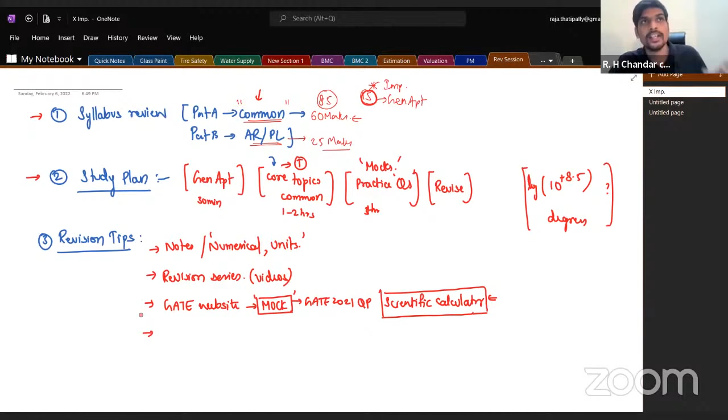Other than that, I would also suggest you go through previous gate papers. You might have already solved some, but I'd say at least sit and solve one paper, or see how you can do it, probably on the last day. When you're not in a state of mind to read something new, you can at least go and practice one gate paper. Even if you've done previous gate questions in general, you can randomly pick up a previous gate paper and try to solve one, sitting from 9 to 12.

So look into previous papers. If you have not yet done so, this is the correct time — do it. If you have already done it, pick randomly one or two papers and try to solve them. That will give you confidence, that will boost your morale before the exam. So look into the previous gate papers if you have not yet done.

If you have done it already, you can also randomly pick up one or two papers, probably an old one too, and look into it. The idea is not, obviously — yes, some questions do repeat — but the idea is not to build up knowledge, but to give you confidence. I told you in these last 6 days, it is equally important to build up your confidence and have a cool state of mind. So work on it — whatever works for you, work on it.

These are some points which I think are probably useful for people. But if you come up with some other new thing which you think will cool your mind, do that without any problems. The most important thing — not only studying but also having a cool state of mind — both are important.

So previous gate papers, that is something you can revise. These are some revision tips which I thought would be kept in mind in these last few days. Other than that, let us also look into some important points with respect to the exam.

During the exam, some important points to keep in mind. This is for the date 13th of February, from 9 a.m. to 12 noon.

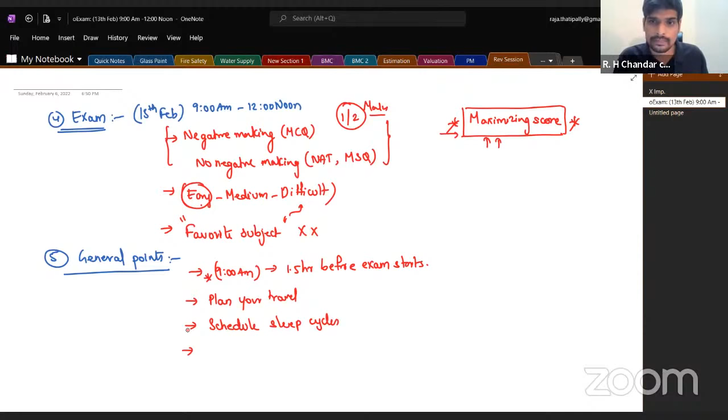I'll book a cab that day and probably the cab won't be available. So try to plan, see if cab availability to your exam center will be there in the morning time. Plan everything, don't have any uncertainty. Plan your travel and also anything else, whatever you can plan, keep it ready. Don't have any unknown surprises at the end moment.

Other than that, what items would be allowed to be carried into the examination center? Items allowed.

Items allowed probably are a pen, a simple ballpoint pen or a pencil. You need not carry any rough sheets, those will be provided to you at the examination center. Just carry a pen or pencil.

Other than that, you'd be allowed to carry the admit card. Most important, don't forget your admit card. Take a printout, have it ready. Physical copy is required, don't have it in your phone, because phones are not allowed in the examination center. I hope that is understandable and you're aware of it.

Have your ID card, the same one whose details you entered during registration on the gate portal. So carry the ID card and take a printout of the admit card.

Take a pen, a water bottle, and sanitizer. The water bottle would be allowed. Mask and gloves would be allowed as per the official notification of the gate portal. Only a clear, transparent water bottle would be allowed as per the guidelines, if possible. Mask and gloves are allowed, and lastly, a sanitizer bottle would be allowed.

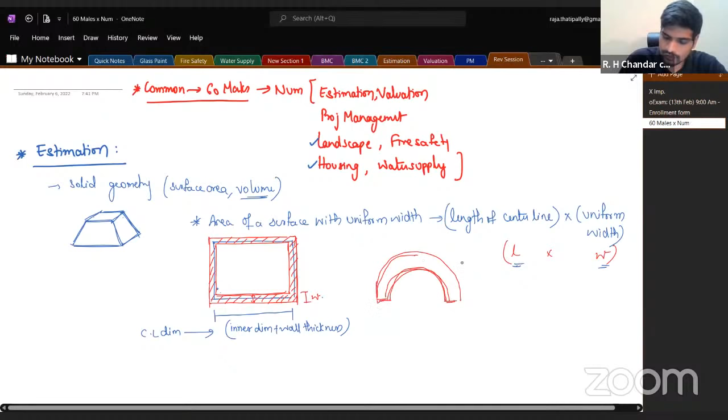Other than that, if you want to estimate an arch - say a semicircular arch or a segmental arch, any form of arch - to estimate the area of this particular arch, since arch also has a uniform thickness W, you use length of the center line L multiplied by the width. So this is one other application. So for any such particular application, you have to use this formula: length of the center line into uniform width, that will give you area. That's point number one, which is important under estimation.

Point number two under estimation is with respect to volume - volume of any prismatic solid. A prismatic solid is something which has a uniform cross-sectional size or cross-sectional area. So volume of a solid with uniform cross-sectional shape and size. Example would be a cylinder. Wherever you cut a cylinder, you will get the same cross-sectional size, a circle, right? So any solid figure with a uniform cross-sectional shape and size, you have to use this formula: volume is equal to the uniform cross-sectional area multiplied by the length of the push of that cross section.

So how do you develop such uniform shape figures? How do you get prismatic solids? You create a cross section and pull it in one dimension to some length L. This is the length L, and this is the area, pi r square, probably for a circle. So for a cylinder, what is the volume? It is basically the area pi r square into h - area of the cross section into the length of it. So this is something which works.

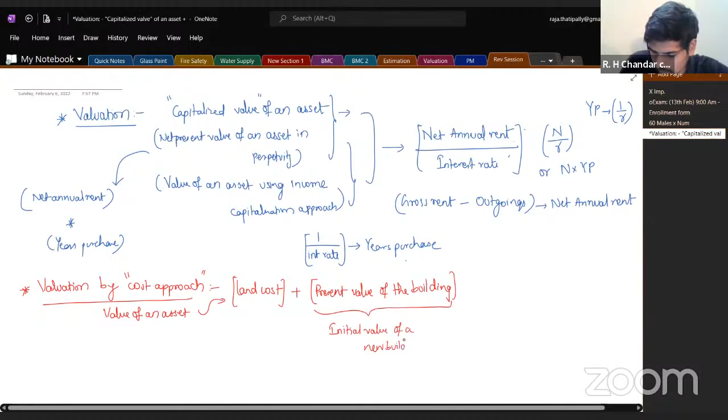So land cost plus the present value of the building. How do you find out present value of the building? Present value of the building is calculated by the initial value of a new building minus the depreciation. Initial value of the building minus depreciation. In the context of valuation, this term can also be called as book value of the asset.

So this is something which you can find out.

Valuation by cost approach: value of the asset is calculated as land value plus the present value of the building, which is the book value of the building. That is basically the value of a new building when it was constructed, say 5 years ago, minus the depreciation for the given number of years. If the building was constructed 5 years ago, you subtract the depreciation for 5 years.

This information related to depreciation will be given to you in the question. If you're using the straight line method and depreciation is given as, say, 1,000 rupees per annum, you use straight line method. If a percentage is given, then you use the diminishing balance method. You need to remember these various methods of depreciation, and look into the details of straight line method (SLM) and diminishing balance method of depreciation.

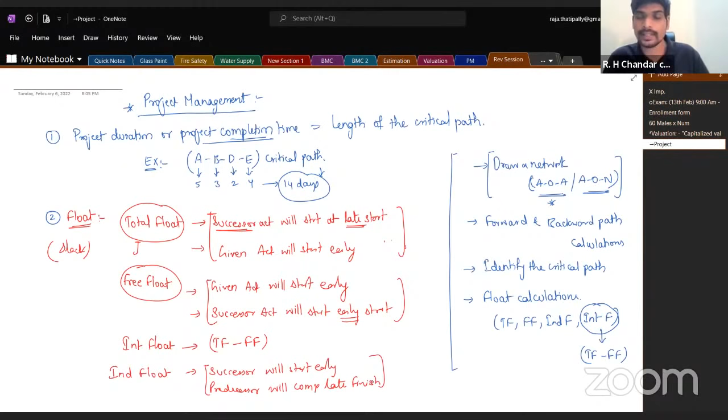This consideration will give you a minimum available time. Subtract the duration from it, you will get independent float. So remember these concepts, have these points beside you, go through the formulae once, try to understand the concept, have sufficient practice. So remember float calculations with respect to project management.

And finally, under project management, let me discuss about PERT, Program Evaluation Review Technique. I'll just tell you two important points under this. Point number one is with respect to expected time.

Expected duration in PERT is given by optimistic time estimate plus 4 times most likely time estimate plus pessimistic time estimate, divided by 6. One of the most frequently asked numericals under project management in GATE exam. Remember this as the first point under PERT.

Second point under PERT you can remember is variance. The formula for variance of an activity, denoted by sigma square, is given by TP minus TO whole square upon 36. This is the second important formula which you can remember under PERT.

Third important point which you can remember under PERT is variance of an activity or variance of a network. Variance of a project is given by sum of... it is given basically by the variance of the critical path.

Remember, there can be multiple critical paths also. If there are multiple critical paths, you need to identify the variance of each critical path and take the maximum one for calculation purposes. So variance of critical path is basically given by sum of variances of critical activities, the critical activities of a critical path. This is also an important third point which you can remember. So how do you find variance of a project? Add the variances of the critical activities. Take all the critical activities, use this formula to find the variance of each activity, add all those variances, and get variance of the project, denoted by sigma p square.

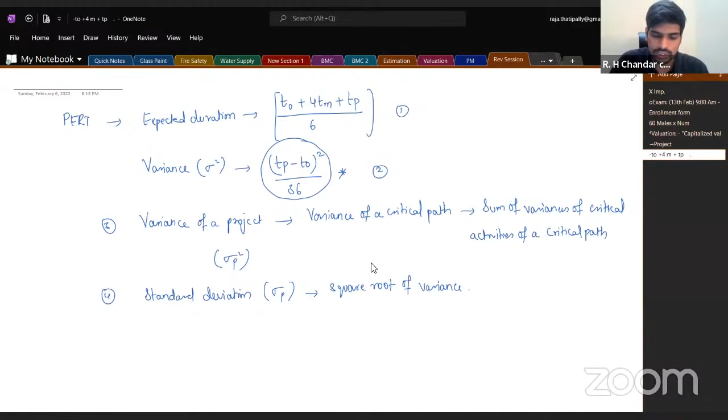So these are some basic pointers which you have to keep in mind with respect to Program Evaluation Review Technique under project management. So that's a quick revision of the project management and estimation and valuation part. Let me discuss some pointers with respect to water supply as well. Let me tell you the important pointers, a quick revision of some points with respect to water supply.

Firstly, you can remember some standards of water supply rate. Rate of water supply is calculated in LPCD, which stands for liters per capita per day. For towns, as per URDPFI guidelines, the required water supply rate is given as 70 LPCD. For cities, it is given as 135 LPCD, liters per capita per day. And for mega cities, it is given as 150 LPCD. So remember these basic standards with respect to water supply.

Other than this, I would also suggest you go through the NBC standards, NBC 2016, volume 2. There is a topic called water supply under the services part. In this, there is a table given for water supply requirement of various buildings, like for hospitals, what is the required water supply rate.

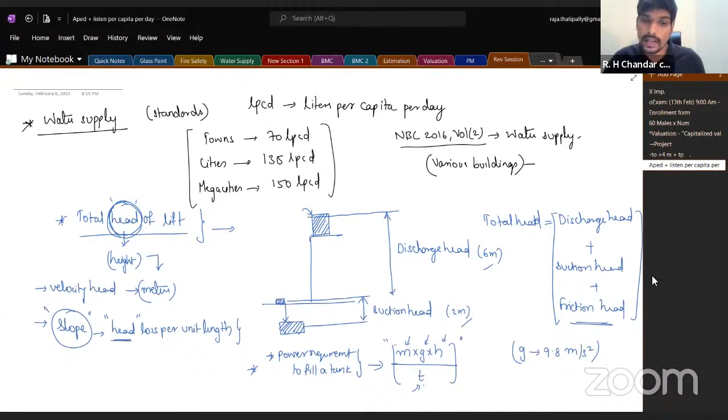Someone is asking what is the measurement unit for friction head. Remember, in every term where you find head, the measurement unit will be meters. Discharge head is taken in meters, suction head is taken in meters, friction head also is taken in meters. You can also call it friction loss.

The idea is, if the suction head is 2 meters and discharge head is 6 meters, you don't buy a pump to work for 8 meters. Rather, you will buy a pump to work for 10 meters. Why am I taking that 2 meters extra? That extra 2 meters is to overcome the friction. Remember this in the exam.

Someone is also asking on mass. Yeah, mass has to be taken in kilograms. Acceleration due to gravity is meter per second square. H has to be taken in meters. Time has to be taken in seconds. If you do that, you will get your answer in watts. Everything in SI system: mass in kilograms, acceleration due to gravity in meter per second square, height in meters, time in seconds. Then you will get your answer in joule per second, that is watts. Remember this.

Next point, let me discuss two important formulae with respect to velocity. Ashik Chakraborty, no, H is the total head of lift. It is got by adding discharge head, suction head, and friction head, all three.

Anyways, moving on. Let me tell you two important formulae with respect to the velocity of flow. Actually, I told you friction head would be given to you in the question. It depends on the material of the pipe. So if it is a CI pipe, if it is rough, its friction head will be different. There's no mathematical approach as such to follow; it should be given to you in the question.

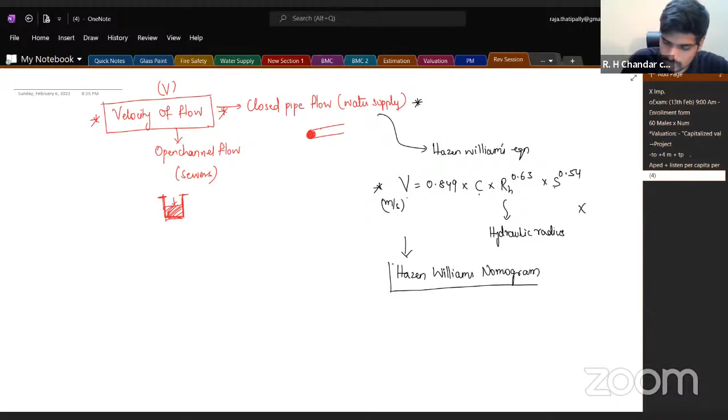Generally, theory questions have been asked with respect to the Hazen-Williams coefficient. In addition to this, you can look into what is the Hazen-Williams nomogram. Take some time and look into the details of this nomogram. Theory questions have been asked with respect to the nomogram in GATE exam from the Hazen-Williams equation part.

However, from the Manning's equation for open channel flow to find out velocity - so in closed pipe flow we use Hazen-Williams equation, similarly in open channel flow, to find out the velocity of flow, we use Manning's equation. There have been numerical questions asked in previous GATE with respect to Manning's equation multiple times. Let us look into the formula for Manning's equation. Velocity is given by 1 upon n, where n is the Manning's coefficient of roughness, will be given to you in the question, into hydraulic radius to the power of 2 by 3, multiplied by slope raised to the power of 1 by 2. That's the formula for Manning's equation.

In both the cases, RH is hydraulic radius. So how to find out hydraulic radius? It is calculated as wet cross-sectional area divided by wet cross-sectional perimeter. This will give you the hydraulic radius of the given flow.

So here you need to be slightly careful while working with open channel flow. Say this is a rectangular cross-section and this is the liquid flow. Wet cross-sectional area is pretty simple - you take the complete area, length into breadth of the flow, that will give you wet cross-sectional area. As far as wet cross-sectional perimeter is considered, you will add only the wet surfaces, this and this. There is no wet perimeter on the top in this case. In open channel flow, you get perimeter by adding this length and this width, L plus W - this will be the wet cross-sectional perimeter, while wet cross-sectional area will be L into W. So remember that the top surface is not added in the wet cross-sectional perimeter, only in open channel flow.

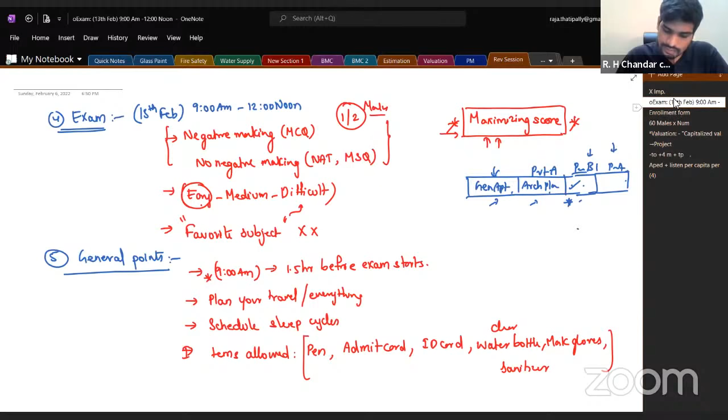Before I end my part, for the architecture portion at least, for climatology revision, lighting, structures, you can look into the revision series as I told you in the initial part. On the same YouTube channel you're viewing this video on, there's a revision series of videos. Each video is probably 25 to 30 minutes long, giving a full overview of history of architecture. Look into the revision series of all sections on our YouTube channel. That will be a good revision source at this end moment of time. Remember, the idea of this session was to revise a few concepts.

What was more important was to focus on these generalized points which I told you as an introduction. Keep those points in mind. I hope you will go to the examination hall in a cool state of mind. That is the most important and absolutely necessary thing at this point of time. Work on having a cool state of mind, whatever works for you. Be calm, be confident in your preparation, and that will really help you a lot in getting a good score in the examination.

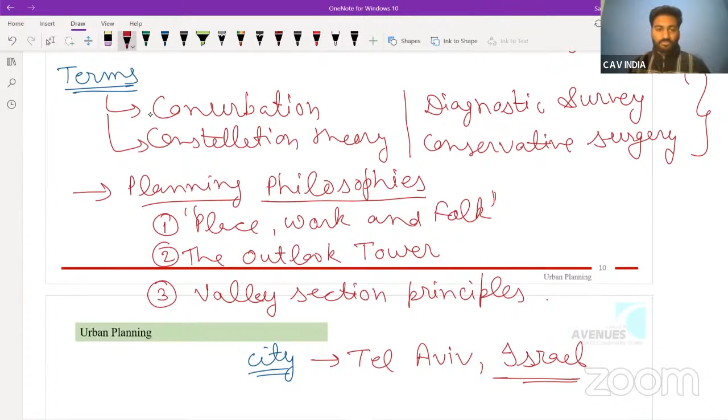Then if you look at another example, let's say we have Sir Ebenezer Howard. For him, you can remember two things. First is Garden City, and second is the theory of three magnets. After that, you can also get into the details, like the theory of three magnets. Basically, there are those three magnets in which you have the town, you have the country, and you have town-country.

Or for the garden city, you should remember the details about the population, about the size that was given, like population should be 32,000, area should be 1,000 acres, and your agricultural belt around it should be of 5,000 acres. Now, based on this information, GATE just phrases it multiple times into different forms, and they ask questions.

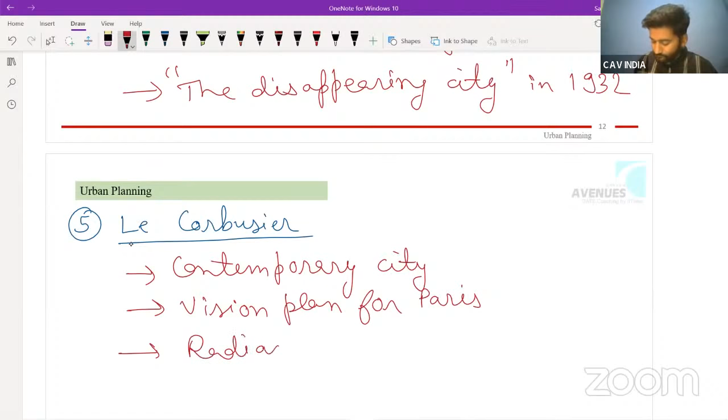Then we have Le Corbusier, and his works include The Contemporary City, Vision Plan for Paris, Radiant City, and Linear Industrial Town.

Now in this part, you need to try to understand that do not confuse between the work of any two planners. Not just in GATE, in other competitive exams also, they ask like Broadacre City is a concept given by whom. So sometimes students get confused that it's by Le Corbusier. So try not to get confused like that. All these details we can remember for Le Corbusier.

We also have Daniel Burnham. And you must be knowing it, the City Beautiful movement.

Now this linear industrial town, we have an ideal industrial town as well. We have self-sufficient industrial town as well. So again, try not to get confused. Like we have, let's first write the name, Robert Owen, with self-sufficient industrial town.

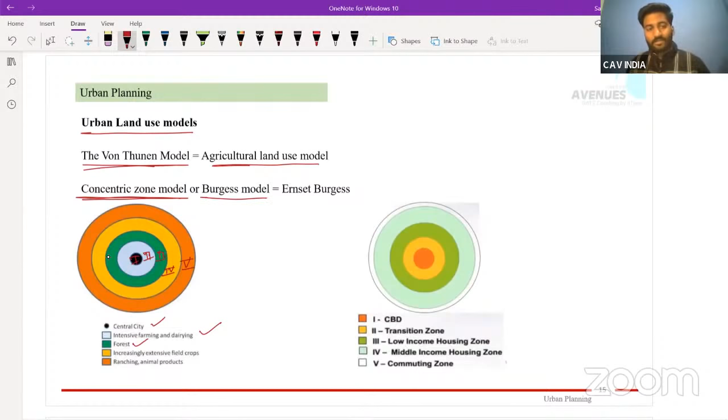Because sometimes what GATE can do, they can number them 1, 2, 3, 4, 5 like that. And then they can ask you about match the following or out of other options given. So this is how you need to remember both of these concentric zone models, both of these having concentric circles, but you should know their land use. It is also called as Burgess model. So if there are multiple names for anything, you need to remember all the details given by Ernest Burgess. So again, for this one, remember the details: CBD, transition zone, low income zone, middle income, then commuting zone.

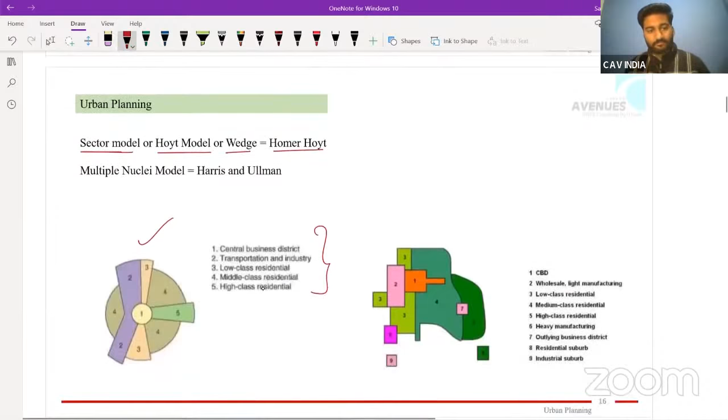After that, we have these two land use models also. One is sector model or Hoyt model or wedge, which is this first one given by Homer Hoyt. All these details, they are similar to this one. He just said that the development will not occur in concentric circles, but it will develop in the sectors. After that, we have multiple nuclei model by Harris and Ullman.

This is this one. Also remember the overall form of it. GATE can just give you the outline of this model and they can ask you to identify it, or it is given by whom. Such questions.

After this, in urban planning, we can again remember some more theories and the names of the theorists. We have growth pole theory, given by Francois Perroux, or Weber's theory of location, given by Alfred Weber, or central place theory, given by Walter Christaller, or core periphery theory, given by John Friedman.

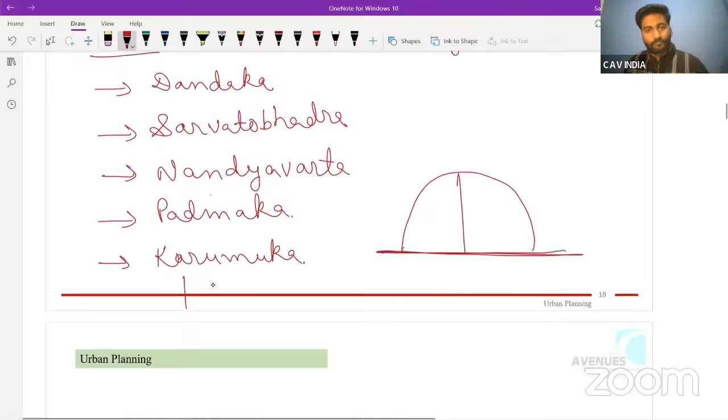After this, when we are looking at cities, you also need to look at examples of Indian cities, and also Egyptian cities, Greek cities. Some of the cities you can go through for GATE perspective are, let's say, first we have the Egyptian cities: Kahun, Luxor, Thebes. For the Greek cities, we have Piraeus, Miletus, Rhodes. At least for sure, remember these names.

After that, you can go through their layouts and see, okay, Hippodamus plan is there, some grid layout is there. So those details you can cover. Just go step by step - first remember whatever is in front of you, that these are Greek cities, these are Egyptian cities. After that, you can go through further details of them.

Then we have Roman cities, like Timgad or Pompeii. Previously a question was asked that Timgad is a type of which city - Roman, Greek, Egyptian. So such simple questions you can also expect in the exam.

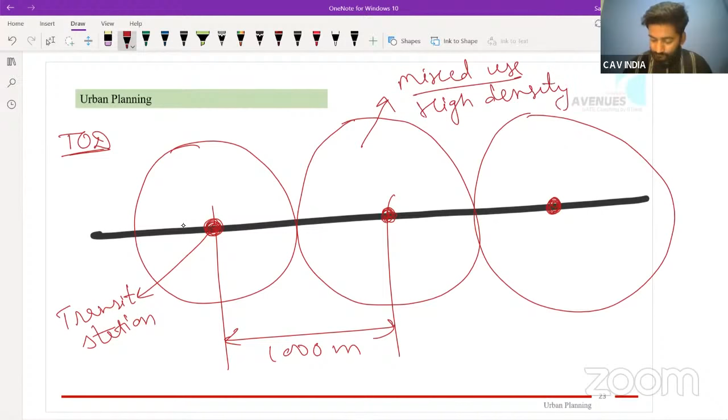So this, we just get an overview of transit oriented development, and that was about urban planning. We discussed the importance of urban planning with respect to GATE exams, what kind of questions, how many questions we can expect, and we also get into the detail of that theory part.

Now if we look at urban housing, again urban housing in GATE exam is important because you can have 2 to 3 questions, and these questions are both theoretical and numerical. In urban housing, the numerical part is very important. You can expect one numerical question each year for sure. And there are different types of numericals in urban housing, so we'll look at that also, and the concepts, what all you need to remember.

As per the new syllabus, urban housing comes under both common and planning parts. The common part includes the concepts of housing and density calculation, whereas the planning part includes the schemes and programs of government. Then not just about housing, but also about slum development. Standards about housing are also covered.

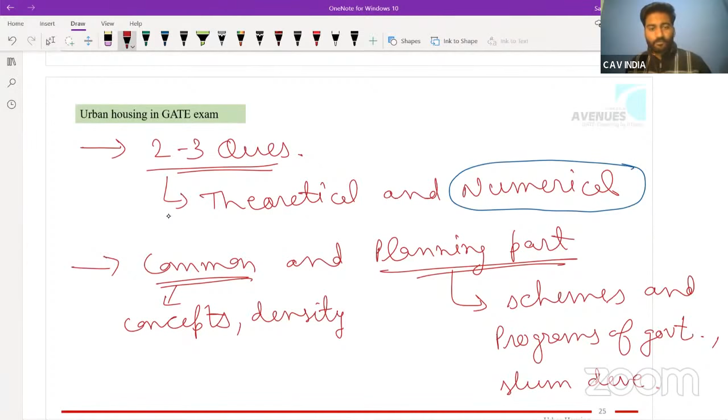So now if we get into the detail of urban housing, first let's start with the basic concepts like carpet area, built up area, super built up area. Carpet area is your area in which you can actually lay down your carpet, so you will not include the area which is covered by the walls.

But also in this carpet area, you will not include certain parts, like you will not include stairs, you will not include shaft, you will not include bathroom, kitchen, balcony. These things are not included.

After this, net area, you can just say that it is the area where one can spread carpet.

Then if you look at the built up area, built up area will include all these areas. It will have the carpet area plus all these above areas, plus it will have the walls and any exclusive balcony if it is there.

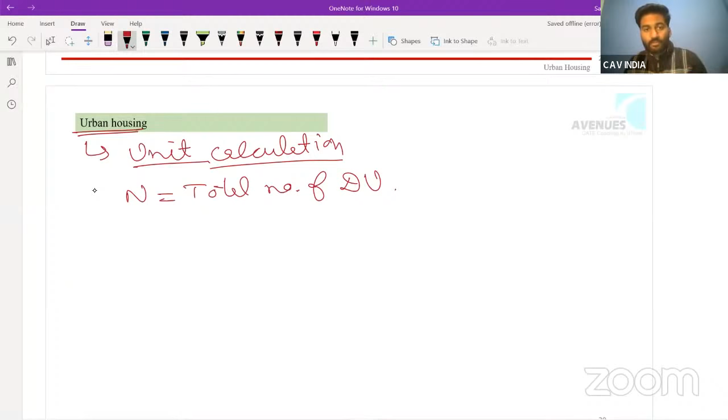In housing, one type of question we need to understand is unit calculation. Let's say we have capital N, which is total number of dwelling units, and there are three different types of dwelling units: dwelling unit 1, 2, 3, or for LIG, MIG, HIG, we can have division in this total number of dwelling units.

Let's write the types: type 1, type 2, type 3. Out of these total dwelling units, they have their share, like P1%, P2%, P3%. For example, 30% type 1, 20% type 2, like that. And each unit of type 1 has area A1, type 2 area A2, type 3 area A3, like 30 square meter area for one unit.

Therefore, for the unit calculation, it will be N multiplied by P1 multiplied by A1. This part gives you the total area under type 1, plus N into P2 into A2 — you first find the number of units under type 2, then multiply with the area of each unit — plus N into P3 into A3, and that gives total built up area. So this is how you find the total built up area.

Now, this total built up area could be given to you using the site area, FAR, all these things. This division could be given to you, and they will ask about the total number of dwelling units. So you need to see what is given, what you need to find.

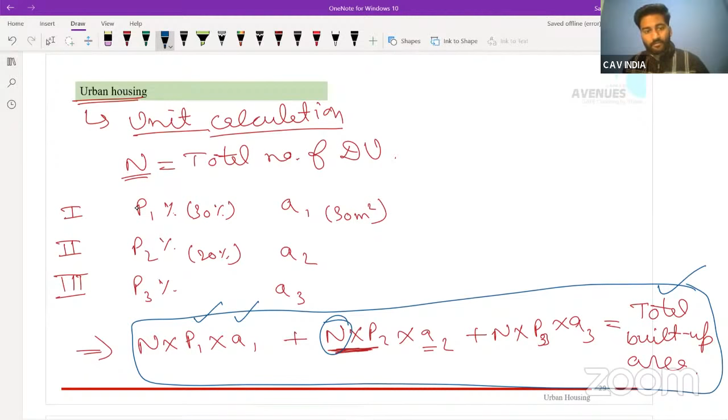After this, we have some financing institutions you need to know, like NHB, National Housing Bank. We have NABARD — these are development financial institutions. Then we have HDFC, HUDCO, some banks, scheduled commercial banks, cooperative banks, and housing schemes. These are different types of financing institutions. Previously, when government became just an enabler, finance was made available to people to build their house. So these are the financing institutions working in the housing sector.

After that, in urban housing, there are different policies or schemes which are basically the guiding principles. You need to remember the names and which year they came: NHP, National Housing Policy of 1988, or NHHP, National Housing and Habitat Policy of 1998. Or NUHHP, National Urban Housing and Habitat Policy of 2007. And the last one is National Mission on Sustainable Habitat. So remember the name, the full form, and the year.

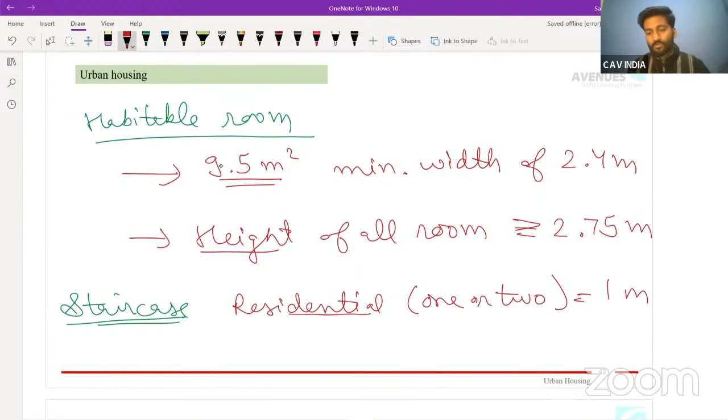Also, if you look at the standard of a kitchen, the height will be same as 2.75 meters, as we have seen. Other details: if you have kitchen with dining, the area should not be less than 7.5 square meters with a minimum width of 2.1 meters. And if there is just a kitchen, then it will be 5 square meters with a width of 1.8 meters. So for the dining part, an additional area of 2.5 square meters was required.

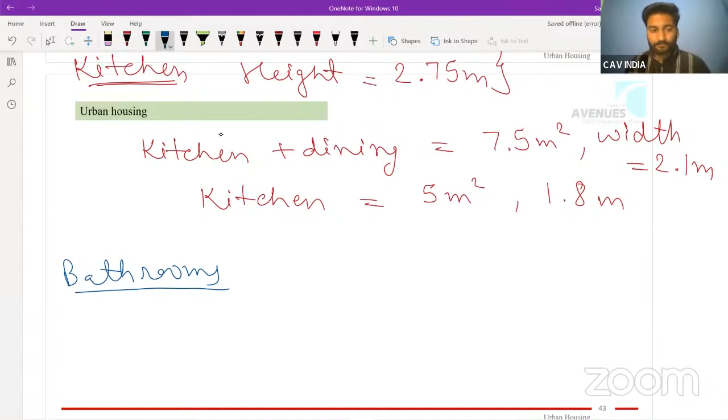Just like kitchen, you can also think of bathrooms. Go through the standards of that. What is the standard for just a bathroom? What is the standard for a WC? What is the standard if both are combined together? Then also remember about the fire tender. These are some general things which GATE keeps on repeating and asking questions on. For fire tender movement, the width of the driveway is 6 meters, and the turning radius there is 9 meters.

So with this, we are done with housing. We saw all the different types of questions they can ask. We understood the concept of them, we looked at the formula, and we also went through the theory part.

Now if you look at urban design, it is also important because you can get 2 to 3 questions on average, so it's like 3 to 4 marks. In these questions, you have majorly theoretical questions, rarely numerical, which also depends upon the degree of enclosure. And it is in the common part of the new syllabus. So we'll cover all those things which are important for GATE perspective in urban design, one by one.

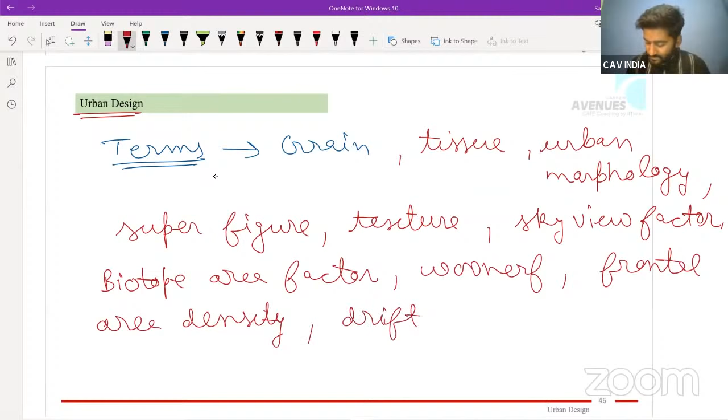Sky view factor, then you have biotope area factor, then we have woonerf, we have frontal area density, we have drift index, etc. So these are some of the terms you should go through for urban design. Also, if you have solved previous year questions, you might have seen some of these terms already. There are also terms like street furniture, street hardware. Look at them.

After this, if you look at the most important topic in urban design, that is degree of enclosure. Basically, let's say this is the person standing here and he is looking at this. So you will consider the height h, you will consider the distance of this person d, and you will find the degree of enclosure based on this ratio h is to d.

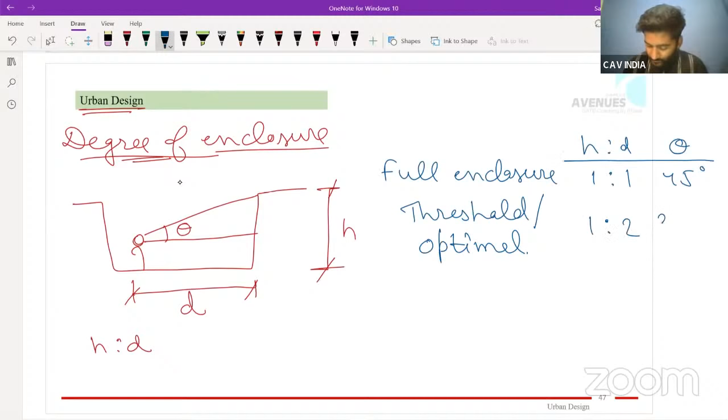For that, you need to remember a table. If you have full enclosure, you will have an h by d ratio of 1:1, or a theta of 45 degrees. If you have threshold of enclosure, or optimal enclosure, the ratio will be 1:2 and the angle will be 26.57 degrees. Then you have minimum enclosure, for which the ratio is 1:3 and the angle is 18.43 degrees. And the last one is loss of enclosure, which is ratio 1:4, and the angle is 14.04 degrees.

Now, all these things on this slide are very, very important for GATE. The reason being, sometimes GATE gives you questions like matching them with their ratio. Sometimes they give numericals like: the person standing in some area is experiencing threshold of enclosure, and the height of the building is given, so tell us at what distance they are standing from the building. So the first thing you should definitely know is this ratio, that it is 1:2.

Now just try to remember these two columns, because if you know how to use tan inverse in that calculator, you can simply find tan inverse of 1/3 and get this value. So no need to remember the values of theta, you can directly find that in the exam. But remember this table, it is very important.

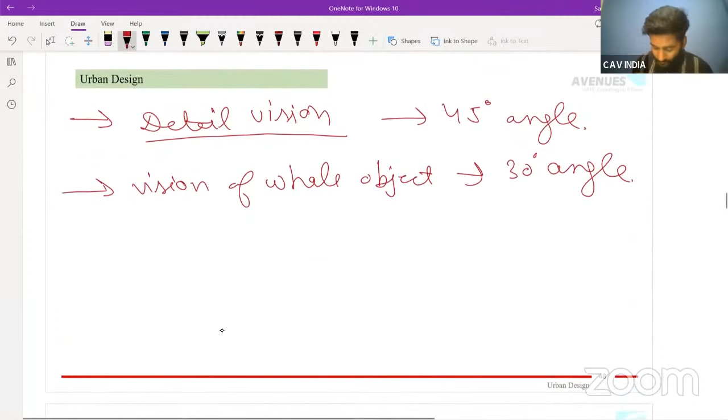Now, along with this table, there are other things, like you will have a detailed vision for a 45-degree angle, you will have the vision of the whole object for a 30-degree angle, and you will have vision of the object plus its context, and that will be of an 18-degree angle. So sometimes GATE gives you these details as well, that there is a vision of the whole object or the context is also visible, so you should know the angle.

Now, after this in GATE, there could be some famous squares, plazas, piazzas, anything you can say, so those you need to remember. Like, for example, we have Trafalgar Square, or we have St. Peter's Square, or we have Piazza del Campo in Tuscany, Italy. For all of these examples, you should know how they look, and if they are famous for something. Like the Piazza del Campo is known for its human scale. So those details you need to remember.

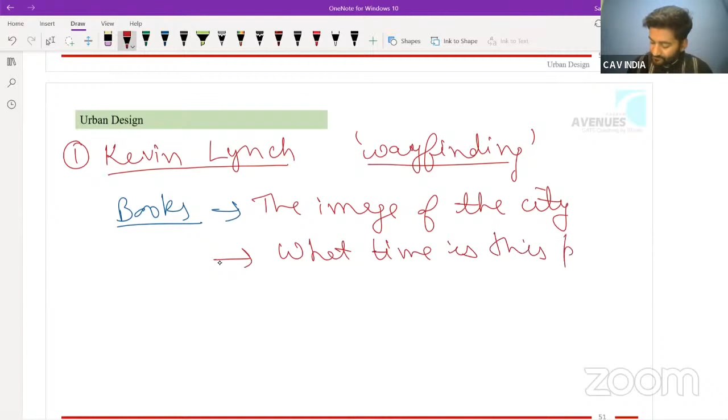The first one we can look at is Kevin Lynch, with the concept of wayfinding. For Kevin Lynch, you can remember some books like The Image of the City, and What Time is This Place? Then there are some terms coined by him, like legibility and imageability.

After this, we have some elements of legibility, which are also very important for GATE. Those elements are path, node, landmark, edge, and district. So you need to remember the names of these, and also an overview of what these are. Like, path is just a way or something.

Node is, you can say, some area where some activity can take place. Landmark could be some landmark building amongst all other smaller buildings. Edge is like, you can say, you are having this on one part and all the skyscrapers, urban area, on this other part, so this is the edge. And for the district, you are having some area in two-dimensional extent, which is having some kind of functional homogeneity. A person can mentally enter inside of it, and activities can take place there, so that is a district. Some residential area, some college campus, some military area, anything — that is a district.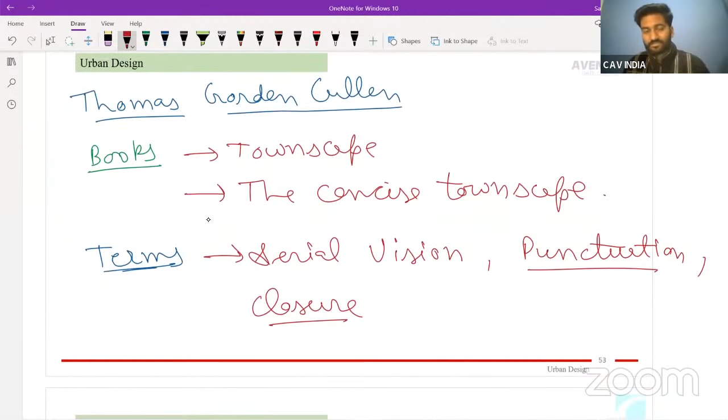Previously a question was asked like, punctuation and closure, these terms are coined by whom? So even if you are very attentive to this revision session, in which you might feel like we are going at a bit faster pace, but still if you are attentive in this one, then these things will help you. As Raja sir previously mentioned, yes, in GATE questions get repeated.

After this, some other names which you can remember are like, we have Edward Hall for theory of proxemics. We have Oscar Newman for theory of defensible space. We have Christopher Alexander who is all for the pattern movement, and you can also write it as he is the father of pattern language movement. A question was asked previously on his name, asking who is the father of pattern language movement.

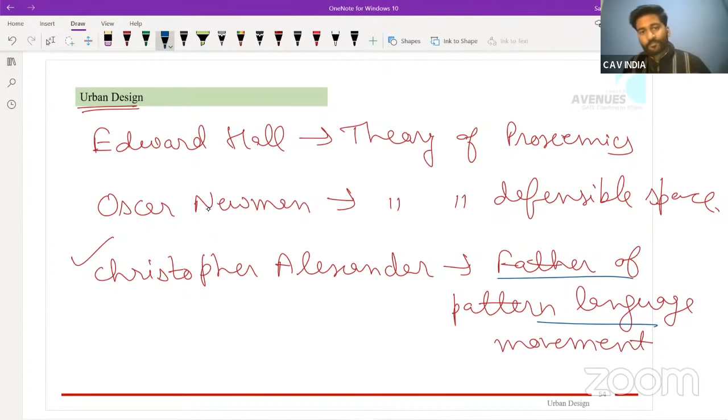Then along with urban design, we also cover conservation. In that part, for conservation, you need to remember the names of various treaties, charters, conventions, and you need to have an idea of which area they are concerned with, like someone with cultural heritage, someone with historic gardens, someone with historic towns and cities, all these things.

So in this we have ICOMOS, which stands for International Council on Monuments and Sites. We have ICCROM, which is the International Center for the Study of Preservation and Restoration of Cultural Property.

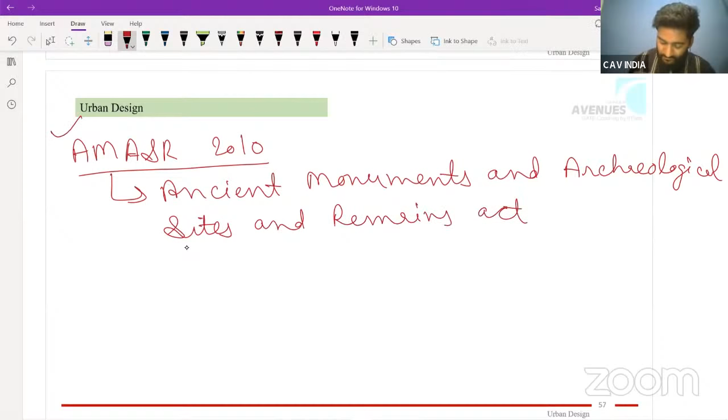And this act gives us three different types of areas. Like you have protected area, which you are protecting. Let's say this is your protected area. After this comes the prohibited area. Prohibited area is basically, let's say you take an offset of it for 100 meters. So this is prohibited area. Any construction is prohibited in this part.

After that comes regulated area. Regulated area goes further beyond on all the directions, not just on these sides. It is 200 meters. So remember that these distances are not from the center of it. They are from this protected area limits, the site of it. You are just taking the offset of it for 100 meters like that. So this is for AMASR.

Then also GATE usually asks a question. It started asking from the last 3-4 years, and that is related to UNESCO World Heritage Sites. So there are three categories: one is natural, second one is cultural, and third one is mixed, a mix of all these.

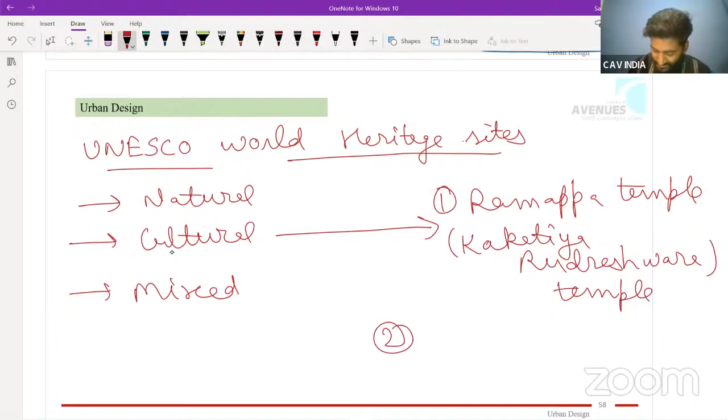So what GATE does, like in 2020 they asked about which sites were added in 2019. In 2019 they asked about 2018. So for this, at least we can remember two sites, which is Ramappa temple or Kakatiya Rudreshwara temple - one site is this one. Second site is Dholavira, Harappan city in Gujarat. So these two are added this year. Remember these names.

Along with this, in conservation part, there are some terms like preservation, restoration, reconstitution. So you can just go through these terms as well. Preservation is just preserving it in whatever condition it is, like that.

So with this, we are done with urban design, urban conservation, all these also. Again, we discussed all the details. We get into a lot of detail for theory part as well.

Next we have landscape design. Now in landscape design, it is also a theory subject, but there are numericals as well, like based on the runoff calculation.

In landscape design, you can expect 1 to 2 questions, sometimes 2 to 3. These questions are both theory and numerical, and this comes in the common part of the new GATE syllabus. In the numerical part, there are two things: runoff and contour interval calculation.

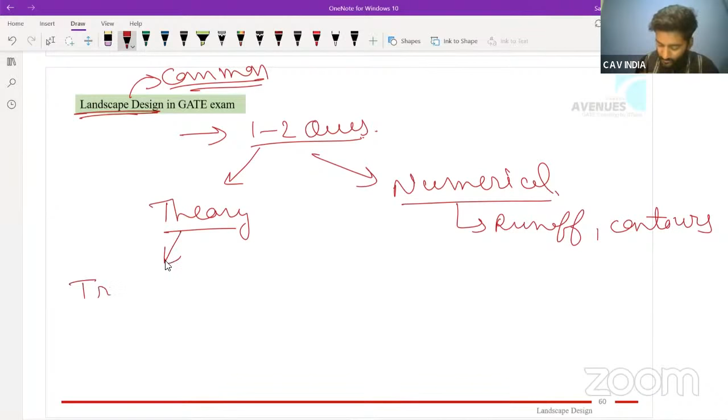The theory part includes trees with their common name, scientific name, and other details. It includes different landscape styles like the Egyptian garden, Chinese garden, and some small terms. These two are the numerical part, and runoff is the most important. If GATE has to ask just one question, it is highly likely they will ask from runoff calculation.

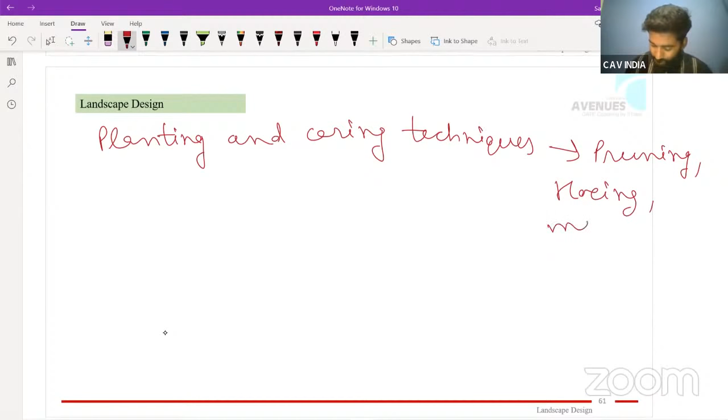If we get into the details, some terms you need to remember are planting and caring techniques, which include pruning, hoeing, mulching, felling, and also irrigation methods.

Pruning is just the trimming of trees. Hoeing is plowing the topsoil so that there could be aeration, better absorption, and removal of weeds. Mulching is covering the top part with some material. Irrigation methods include drip irrigation, sprinkler irrigation, and flood irrigation.

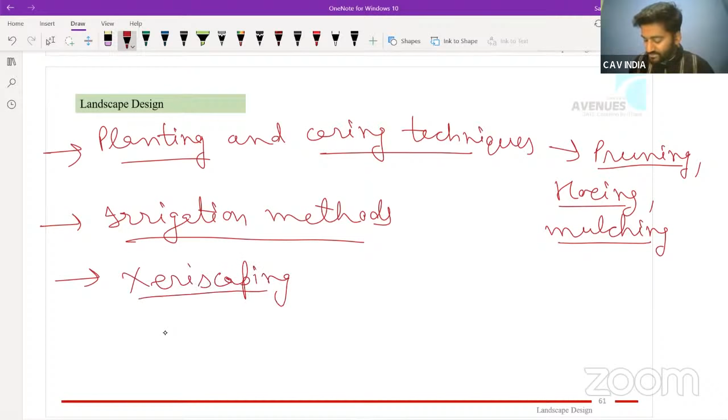Then there are small terms like xeriscaping, in which you focus upon no irrigation or very minimal irrigation, employing such methods. Then there could be different tree sections, like different components in a tree section - what is sapwood, what is heartwood, then cracks.

Also in landscape, we have terms like transpiration, which is the movement of water from the roots through the entire body - it goes to the leaves and then leaves the tree from the leaf. Then we have phototropism, in which the plant bends towards light. We have photoperiodism, in which they depend upon the duration of light they are getting. These are very easy small terms which you can go through.

After that, in landscape comes the scientific name of trees. This part is very important. The details you need to remember are: first, the scientific name; second, their common name; third, you should know the shape of leaves, their bloom color - the color of their flowers. These are the specific characteristics of these trees. GATE can directly ask questions like, Plumeria alba is what?

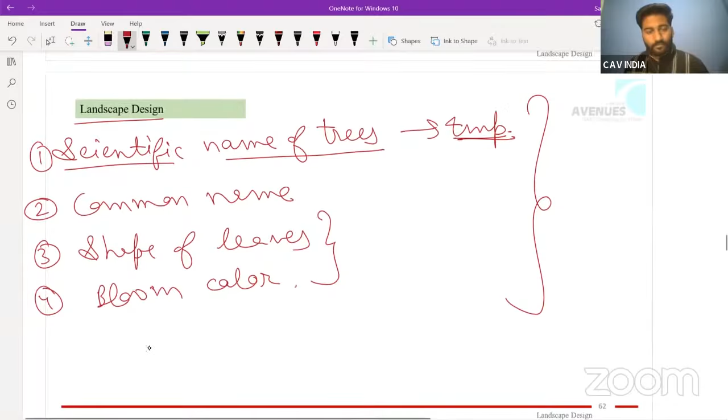For the theory part, I'm just telling you what all is very important for any subject, what you can look through in this last moment. For the numerical part, I'm explaining the entire concept so that you can solve the questions.

In landscape, if you look at the concept of runoff - runoff is basically when you have some area and on that you are having rainfall. We are concerned with what is the water we are getting here in terms of runoff, the quantity of it. For the calculation of this quantity Q, the formula we have is Q equals C into I into A. It's that simple. This Q is the quantity.

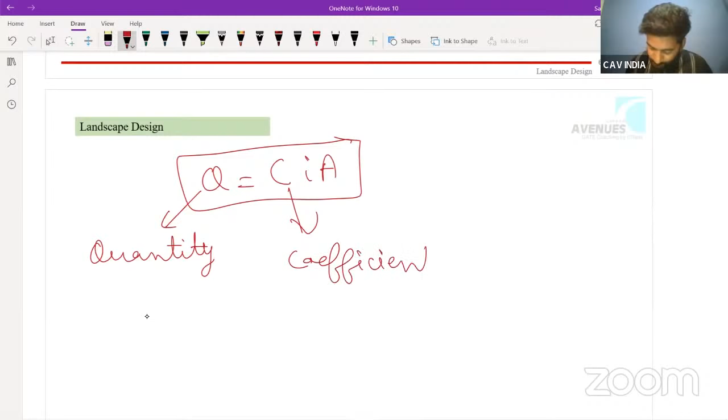C is the coefficient - surface coefficient, runoff coefficient, anything. I is the intensity of rainfall. And A is the area, which is contributing to the overall runoff.

Now in this, you need to remember the units while putting in the formula. Intensity of rainfall is usually given as mm per hour, so you need to convert that into meters. Area is usually given in hectares, you need to convert it into meter square. Coefficient is unitless. After that, this quantity you will get in something like meter cube per hour. So you need to look at the question whether they are asking in meter cube or in liters, and convert accordingly. So take care of units - they are very important for runoff calculation.

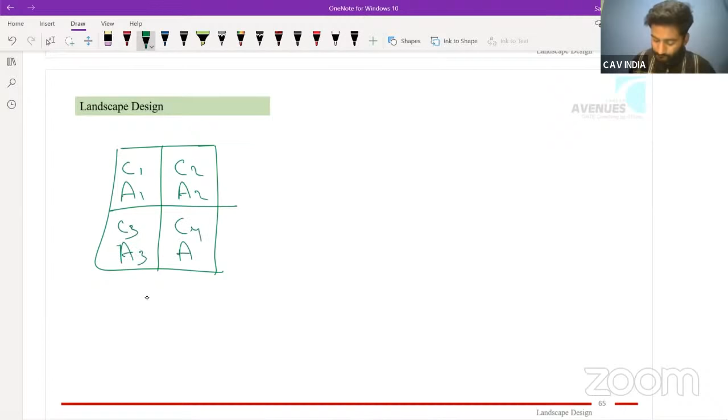In this, if there is only one surface, that would be having the direct coefficient. If there are multiple types of surfaces, let's say 4 types of surfaces with their own coefficient and area, in that case you first need to find a composite runoff coefficient, which is C1A1 plus C2A2 plus C3A3 plus C4A4, divided by the total area. From this, we find the composite runoff, and then we can directly use this composite runoff, let's say C dash, in the formula Q equals C dash into I into A.

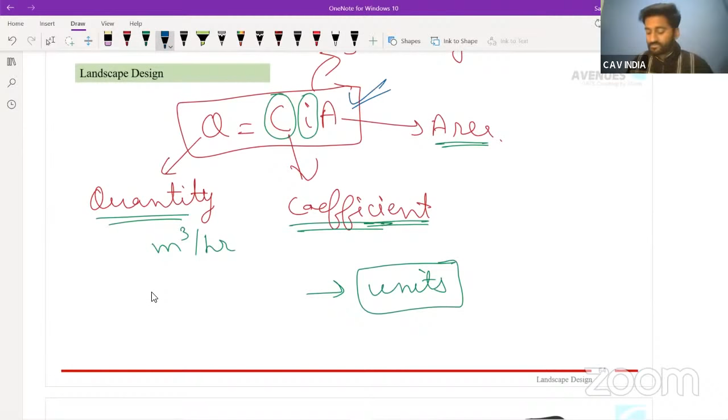This is the same formula which we covered earlier. It's just that sometimes there could be multiple surfaces, so first you need to find the coefficient, then you have to find the quantity.

After this, in landscape, we have landscape styles. Landscape styles are basically different styles, different gardens: Egyptian gardens, Japanese gardens, Chinese gardens, French, Mughal, Persian, Spanish, all these. So they have some unique characteristics which you need to remember.

You need to look at the elements of each garden. If there is some ideology which they follow, you need to look for that. Ideology is like if they are highlighting the main building, or if the building is subdued.

Then look at the unique characteristics. Like, the Japanese garden has the concept of dry garden. Now this is a favorite — they have multiple times asked about what the dry garden is associated with. So it's with the Japanese garden.

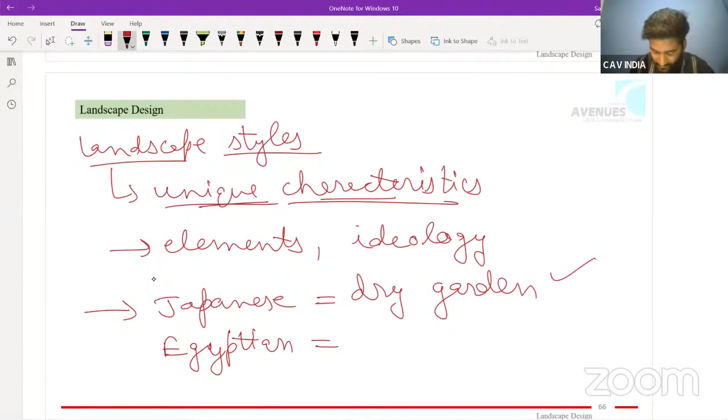Or let's say with Egyptian, there is a type of funeral garden. So this is unique to Egyptian. Or let's say when we were talking about these elements, in Chinese gardens we have some zigzag bridge shape, like this. So this is how you can remember these elements in detail.

This was about all the landscape part — about the trees, about the numerical, and about the landscape styles.

If we look at the contours, you should know what is a contour interval — basically the elevation difference between two consecutive contour lines. You should also know what is an index contour, which is the fifth contour line, made bold in a contour map.

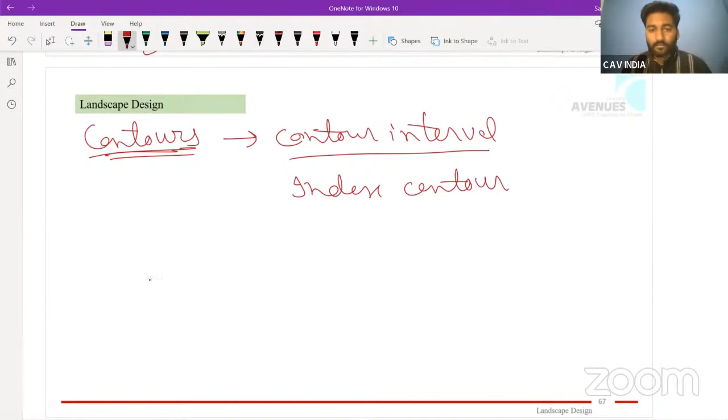You also need to look at the properties of contours — contour lines never intersect each other. They will tell you about the landform, about the slope, steep slope, gentle slope, all these details. Then you need to know the landforms — different types like a hill, a ridge, a valley, a spur, a saddle, a depression, anything.

Previously a question was asked in which they asked us to find the ridges and the valley. So what you can do to identify a ridge in a contour map is look at the U or V shaped contour lines.

And they will be having their closed end. Closed end is basically this part, pointing towards a lower elevation — that will be a ridge. And if you take the opposite, where this closed end points towards a higher elevation, then it will become a valley. So this question was asked previously.

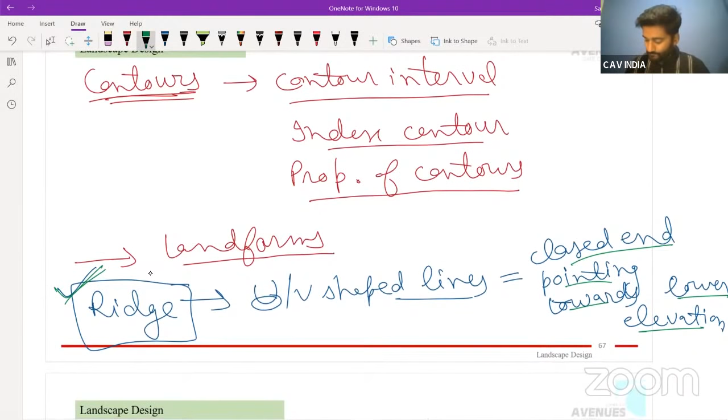You can just remember this information and you can expect marks from this concept. This was for the theory part of contours.

So we all know that tan theta is equal to slope, which is equal to perpendicular upon base — which implies slope will be equal to rise by run. Directly remember this, first thing.

Second thing is about the contour interval. This will be given by rise divided by number of contours minus 1. This minus 1 is in the denominator.

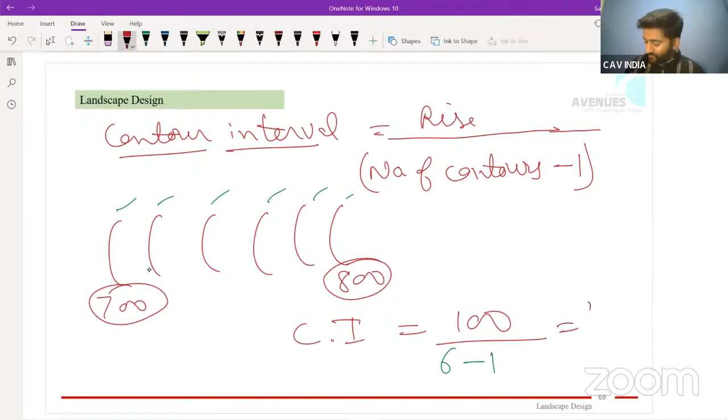For example, if you have 6 contour lines, and this is 700, this is 800, your contour interval will be equal to the rise — which is 100 here — divided by the number of contour lines, which are 1, 2, 3, 4, 5, 6, so 6 minus 1. So it will be 100 divided by 5, giving 20 as the contour interval. Direct, straightforward.

Sometimes there could be a question where slope is given, run is given — so first you will find the rise, then you can use that rise to find the contour interval. So they can mix both of these formulas together to solve it and get the answer.

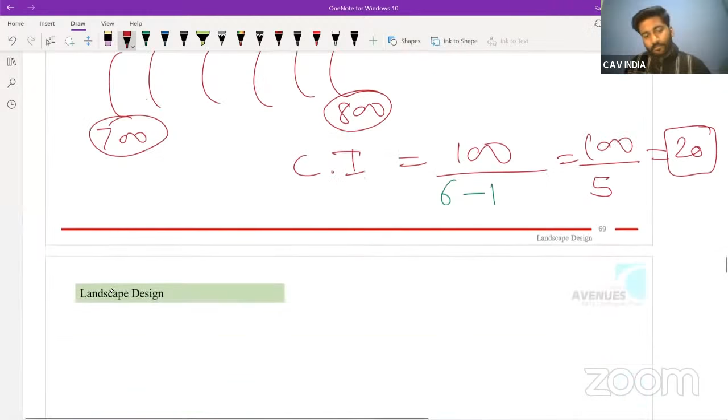And the last thing, which is very basic and you're all already aware of, is related to the scale, which is nothing but distance or length on map divided by actual distance — like what we always do on any map. So you can use these three things to solve any question related to contours.

And with this, we are done with landscape design. You can watch this video at 0.75 speed.

Next we have planning techniques and management. Now this is a big subject, there are a lot of topics in it. In PTM, 3 to 4 questions are usually asked. This year they asked like 6 questions.

They are both theoretical and numerical, and it is in the planning part of the new syllabus. So the different topics that we have: first is land use codes.

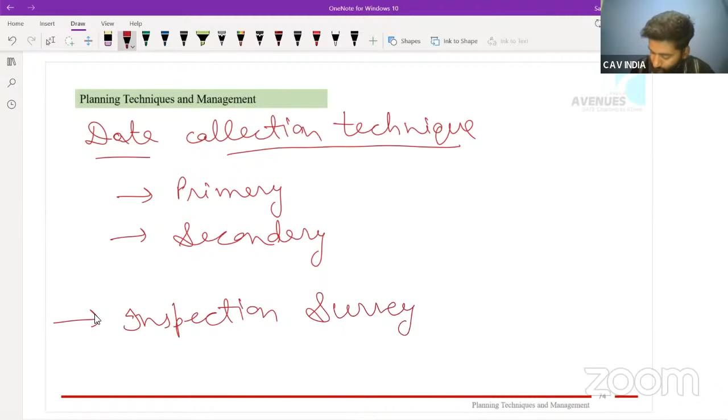Next, there is a concept of data collection techniques, like primary data collection, secondary data collection, all these things. In this, one topic is very important, and that is inspection survey, which actually falls under the primary category.

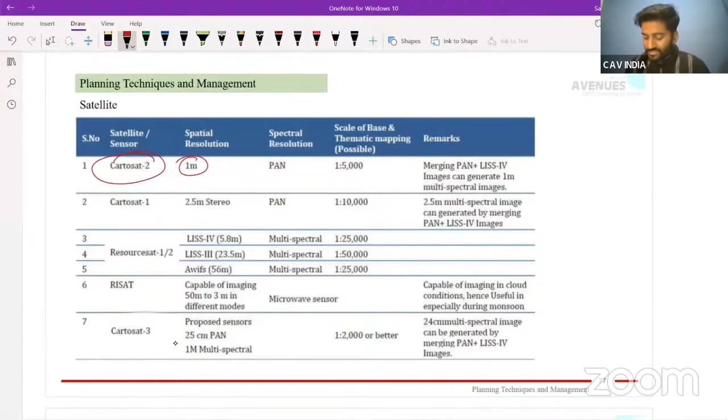Then this table is in URDPFI, for some satellites. You need to remember for each satellite what is their spatial resolution and spectral resolution, at least these two columns for sure. This Cartosat was launched in November 2019.

After this comes population projection methods. Just remember the formula directly: for arithmetic increase, the formula is PT, your target population, will be P naught plus KT, where K is the constant increase you are having.

Then in the geometric one, you have PT equals P naught into bracket 1 plus K by 100 to the power T. So K is that constant rate with which the population is increasing. P naught is the base population from which you are calculating, and T is the time period from P naught to PT. Directly put the values and get the answer.

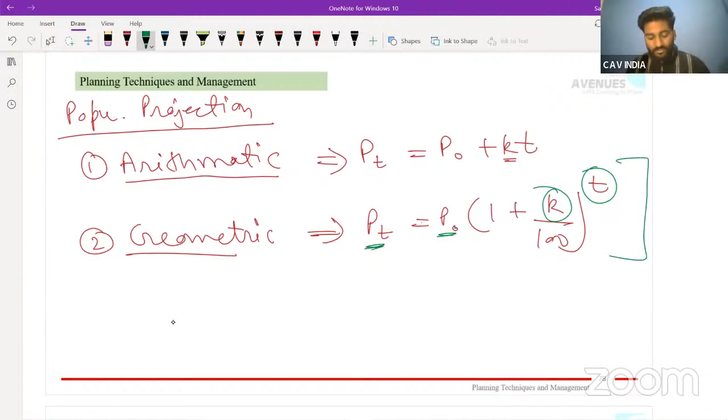Third, we have exponential. For exponential, the formula is P equals P naught multiplied by e to the power RT. For this formula, you need to remember the value of e, which is 2.718, because you need to put that in. T is again the same time period, PT is the target, P naught is the starting population, and e is the Euler number.

So these three methods - GATE usually asks questions only up to these three methods. So remember their formulas directly. I have also explained the components of each formula so you can put the values.

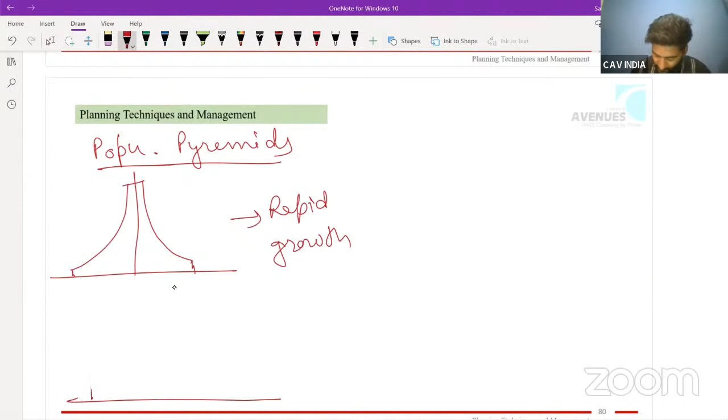Then comes the population pyramids. For this, if you get a shape which is something like this, you will say that it is having a rapid growth. If you get a shape which is something like this, it is having a slow growth. Previously GATE has given you these outlines and asked which one is showing which growth.

If you are having it as a straight one, because this is straight, it is showing zero growth. And then if you are having it something like this, because of this lack here, it is having negative growth.

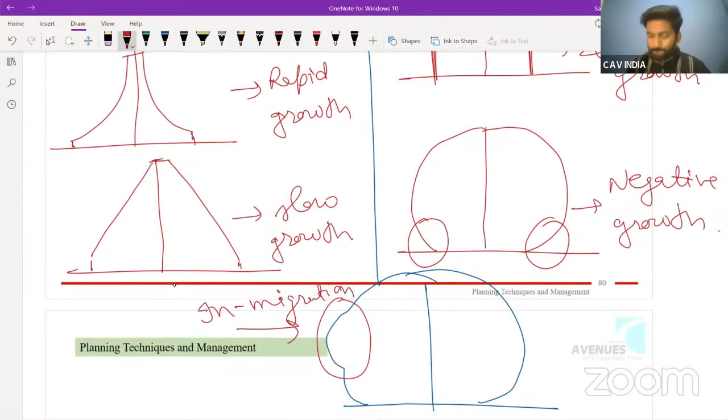And after this, if you have something like you are going regular but there is a bulge in here, this bulge will tell you there is a lot of in-migration, if it is on the left side. So you can directly remember these details, the shape and what type of growth is there. A 2-mark question was asked previously on this.

After this, in PTM, there is also a law, which is RFCT LARR Act of 2013. This stands for the Right to Fair Compensation and Transparency in Land Acquisition, Rehabilitation, and Resettlement.

In this, there is something called the consent clause. This consent clause says first, you need to take consent of 80% of families if the acquisition of land is for private companies. You will take consent of 70% of families if the acquisition is for public-private partnership.

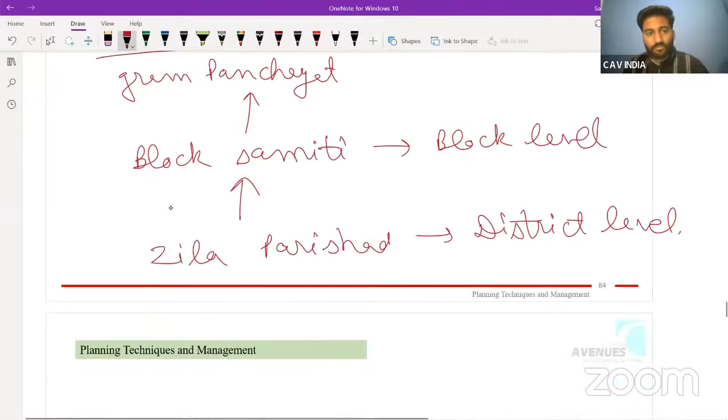Same as we have this hierarchy for the rural area, we have for urban as well. We have the Nagar Panchayat, then we have municipal council, and then we have municipal corporation. So this covers all the necessities for the 73rd, 74th constitutional amendment.

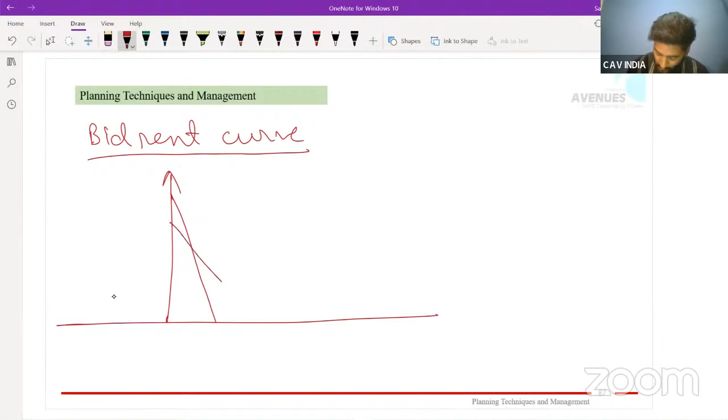Towards the end of PTM, we have a bid rent curve, which is basically how the bid rent changes with distance from the center - how much rent you are willing to pay. You need to remember that the first one is for retail, second is for manufacturing, and third is for residential. GATE once asked a question with A, B, C options and asked which one is what. So you should know first is retail, because they can afford the maximum rent - they can be near the CBD.

We have some PPP models, like BOT, BTO, BOOT. If you remember the full form of them, it will be very easy for you. Like BOT is build, operate, transfer - so you will build it, you will operate it, and in the end transfer it to the government. Or BTO, which is build, transfer, operate. Just go through these PPP models and try to understand what's happening from the full form, like I explained in the first case. GATE can give you the description, and then ask which model it is.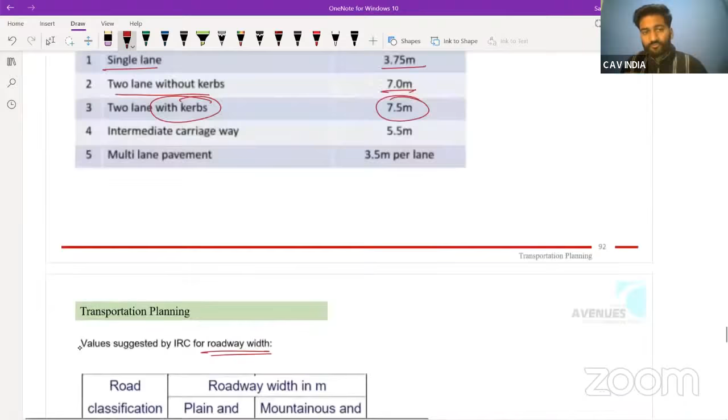Then these are for the roadway width. So if you first learn this table, you will know that roadway width is this part having the carriageway and the shoulder. So this table tells you about the road classification for different type of road and also the different terrain we are having: plain, rolling, mountainous, steep.

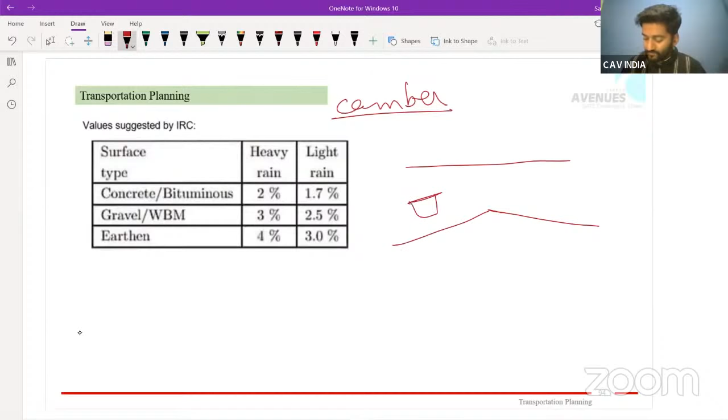Then value suggested by IRC for different surface types and heavy rain. This is basically standard for camber. Camber is, you might have seen in that image that the road was not straight like this, it was something like this, so your vehicle will move over them like this. So when we are doing it, this is for the drainage. How much we need to do depends upon the surface type and the condition of rain. So that is camber. These are important standards, you need to remember them.

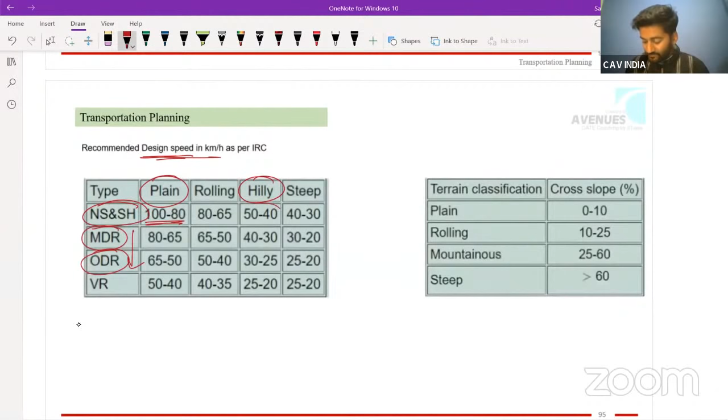Then we have something like design speed. Design speed is the most important factor for designing the road. And maximum speed you can have is in the plain terrain for national highway. Then for major district road, for other district road, it will keep on decreasing. In these hilly areas, it will further decrease. This is how you can remember the table.

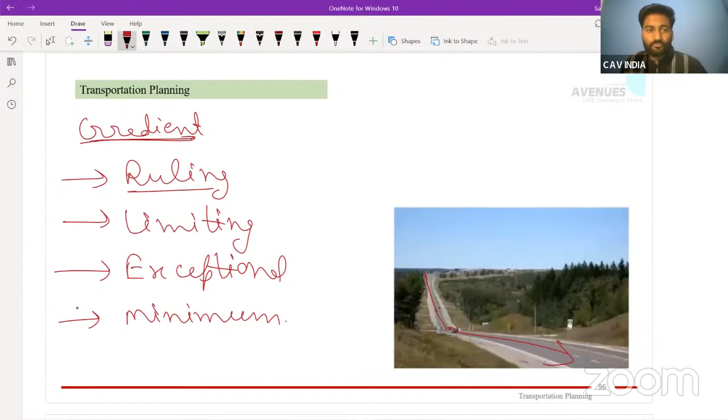Then we have a concept of gradient. Now, gradient is basically 4 types: ruling gradient, limiting gradient, exceptional gradient, and minimum gradient. Gradient is basically this part you can see here, how much rise and fall you are having. Ruling is what you will try to design the road with. Limiting you will provide because ruling is causing a lot of cost overrun. Exceptional you will provide in the exceptional condition where limiting can't help. Minimum you will provide for the side drainage, minimum gradient that should be there so that water can drain out in the side drains.

So that is gradient, and for that we have a concept of grade compensation. This grade compensation, the gradient we have seen, so sometimes when you have conditions like this, the vehicle cannot make this round turn, they cannot compensate, they cannot tackle the gradient, so you need to decrease the gradient. For this you need to remember three steps.

First step is whether the grade is flatter than 4% or not. So if the gradient given is 3%, you will not provide any compensation. If it is 5, you will provide. Second, the value will be 30 plus R by R%. This is how much you need to provide. So this is how you will calculate the grade compensation.

And third thing is you cannot provide the value you are directly getting here. So you need to look at the maximum, which you will get by 75 by R%. These three steps you will do one by one. You will get the final grade compensation which you can provide.

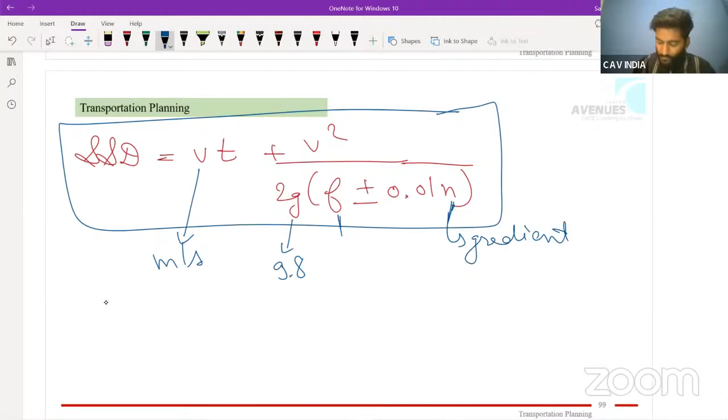Now, if you calculate SSD, ISD will be equal to twice of SSD, or you can say that for two vehicles, you will find SSD separately - SSD1 plus SSD2, and you will add that.

Another thing, if you calculate SSD, then HSD is same as SSD. Headlight sight distance is same as stopping sight distance. So just remember this one formula. You can find three things out of these four.

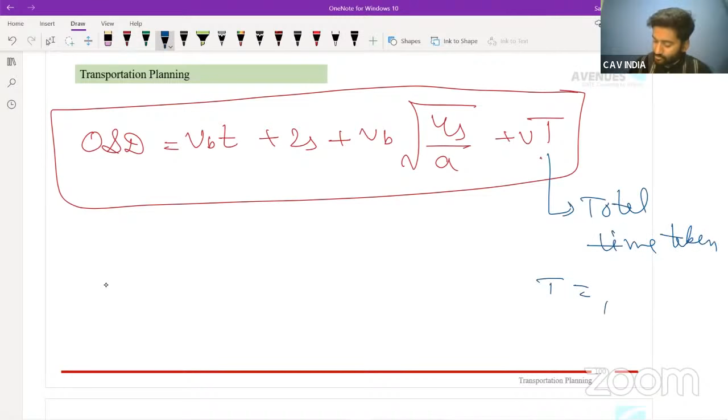Then there is just one thing, which is overtaking sight distance. It will be VB into T plus 2S plus VB root 4S by A plus V into capital T. T is the total time taken, and T is also equal to root 4S by A, which is basically this part. Always put it into meter per second.

It will be given in kilometer per hour. This T will be 2.5 seconds. This S will be 0.7 VB plus 6. So this is how you can find stopping distances, overtaking sight distances.

Then we have traffic intersection. First we have is at grade. At grade is basically which you usually experience - here you are having the red lights. And we have grade separated - grade separated are basically you are providing a flyover over a road.

So in the at grade, you have different types like T or cross or Y junction or scissors or some skewed Y or some staggered T. All these are at grade. Also in this at grade, there are a lot of conflicts like the traffic, they will intersect with each other, their path will cross. So when you have T...

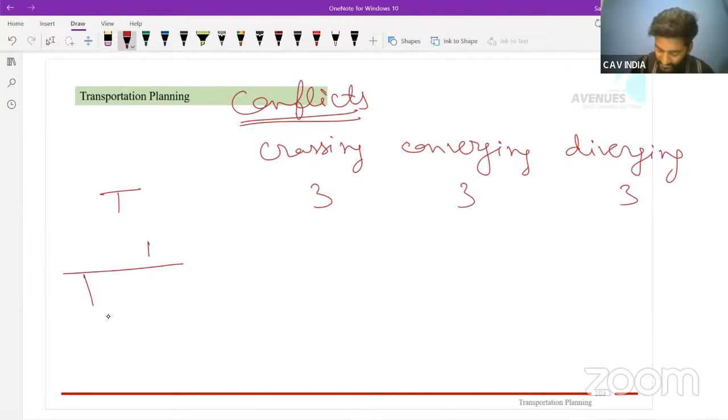We are looking at the conflicts - we have crossing, converging, and diverging. So in case of T, you have 3 crossing, 3 converging, 3 diverging. In case of a 4-legged, you can say that you are having 2T, so you have 6, 6, 6. In case of having 4-legged like this, you have 16 crossing, 8 converging, 8 diverging.

3-4 questions are previously asked from this concept. Directly remember the values. It will help you in getting marks.

Grade separated will be basically like you are having an underpass or an overpass, a flyover, a trumpet interchange at T junction, a clover leaf, something like this, a partial clover leaf in which there will be just 2.

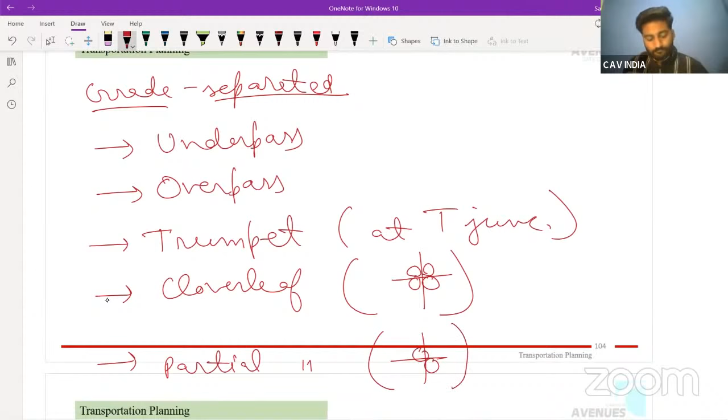Super elevation is E. F is your lateral frictional factor. V is again in meter per second, the velocity. G is 9.8. R is the radius of this particular section.

After this, we have travel demand modeling. And you need to remember the forecasting models for this 4-stage model. That is, we have trip generation, trip distribution, mode choice, and trip assignment.

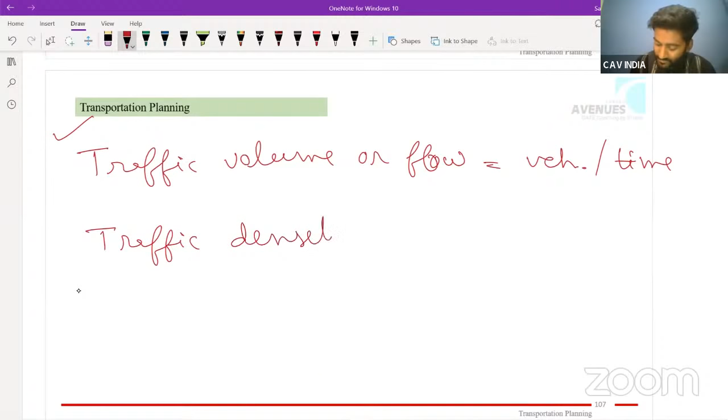Or you have traffic density, which is vehicle per kilometer. Or you have parking load, which is vehicle hours - see, this is in multiplication. All of these, they are in division. So remember this difference.

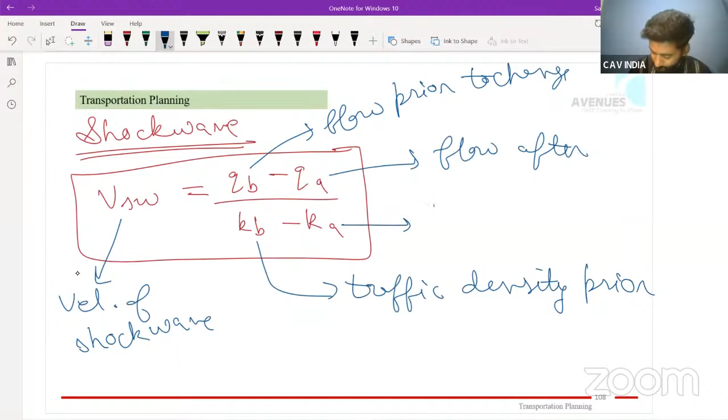Then there is a small concept of shock wave. For that, you need to find the velocity of shock wave, which will be equal to the flow before and after, divided by the density. This is the velocity of shock wave, this is the flow prior to change, this is the flow after change, this is traffic density prior, and this is traffic density after. These conditions will be given in the question - flow prior to change, flow after the change. You need to understand the question and directly put the values in this formula, you will get the answer for shock wave. In 2019, they asked a 2-mark question from shock wave.

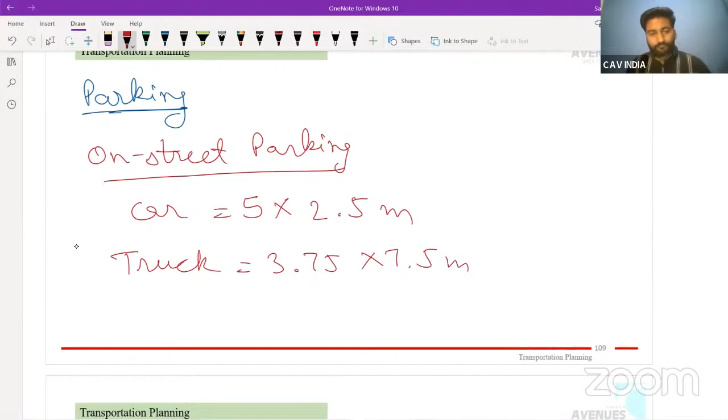Then there is a concept of parking, on-street parking, off-street parking. So we need to consider on-street parking. For a car, we will consider 5 multiplied by 2.5 meters, and for a truck, it is 3.75 multiplied by 7.5 meters. Both of these are in meters. The question will directly tell you whether it is 30-degree parking or 45-degree parking. Directly put the formula, it will be very easy for you instead of going for derivation.

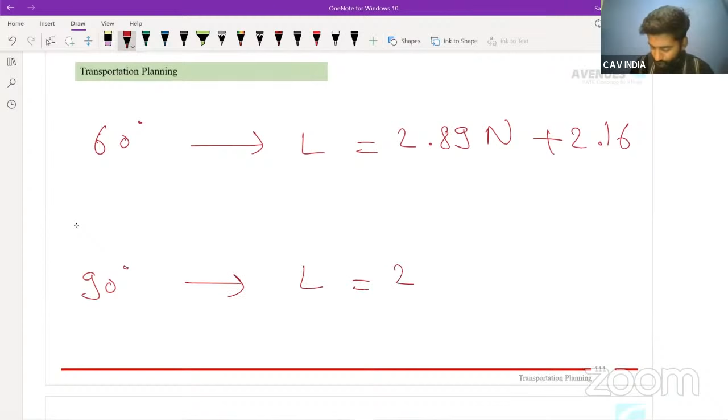So these are the formulas, just directly remember them. Either they will ask you about the length, or they will provide the length and ask how many vehicles you can park. Put the values, you will directly get the answer. Now this one slide we can leave, this part I kept for the parking.